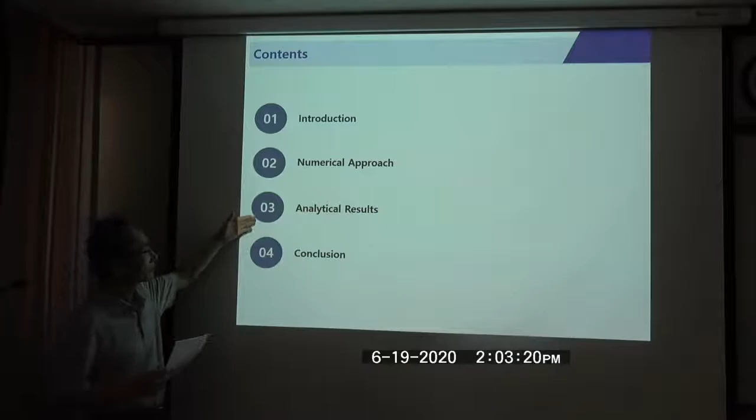Today I'd like to present a paper regarding air purifier technology trend. For this paper, I organized it this way: first the introduction, second the numerical approach, then analytical results, and finally some conclusions.

For the introduction, there are many issues based on the serious problems in the atmosphere. Due to the deterioration of air quality caused by environmental damage and high-level industrialization at home and abroad, measures against fine dust are currently very serious.

In China especially, environmental problems have become very serious due to the increase in vehicles, climate, inland area, and satellite urban development. This fine dust not only poses its own risk but also causes health problems that seriously affect health.

The demand for air cleaners has rapidly increased. Air purifiers have been used primarily for public or medical facilities, but recently, as demand for household use has increased, various development has been conducted.

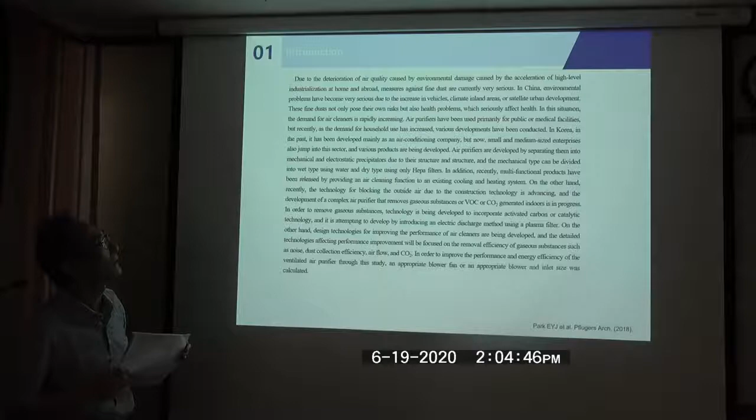In Korea, in the past, air purifiers were developed mainly by air conditioning companies, but now small and medium-sized enterprises are also entering this sector, and various products are being developed.

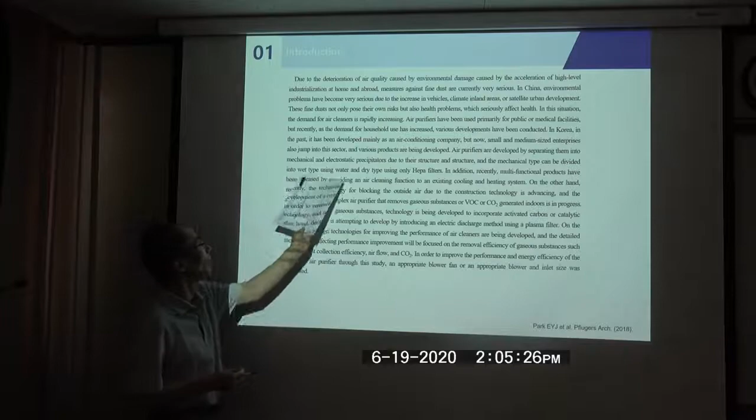Air purifiers are developed by separating them into mechanical and electrostatic precipitator types based on structure. The mechanical type can be divided into wet type using water and dry type using only HEPA filters.

In addition, recently, multifunctional products have been released, providing an air cleaning function through an existing cooling and heating system.

On the other hand, recently, the technology for blocking outside air due to construction techniques is advancing. And the development of complex air purifiers that remove gaseous substances, such as VOCs or CO2 generated indoors, is in progress.

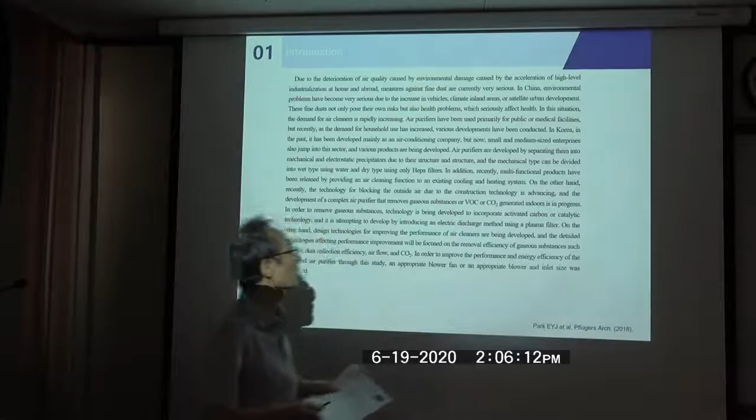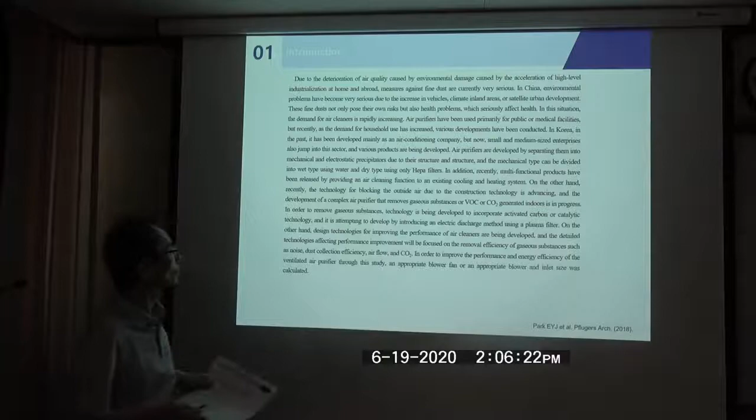In order to remove gaseous substances like this, mainly CO2, technology has been developed to incorporate activated carbon or catalytic technology, and there are attempts to develop methods using an electric discharge method with a plasma filter.

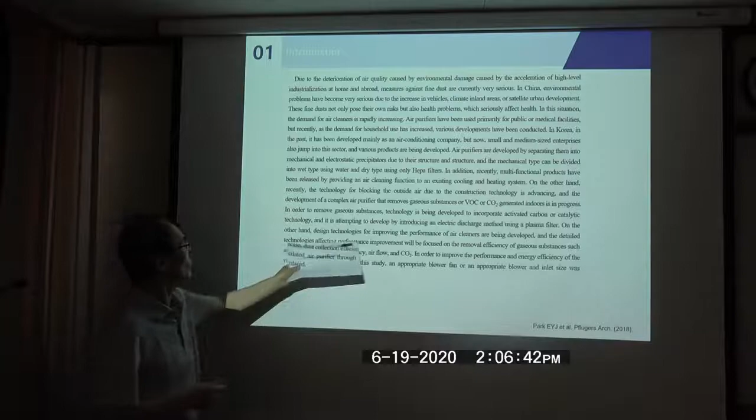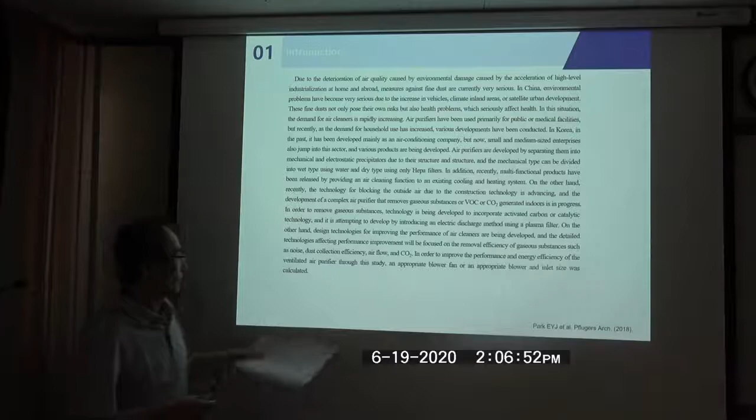On the other hand, design technology for improving the performance of air cleaners is being developed. The detailed technology affecting performance improvement will focus on removal efficiency of gaseous substances, noise, dust collection efficiency, airflow, and CO2, in order to improve the performance and energy efficiency of the ventilated air purifier through this study.

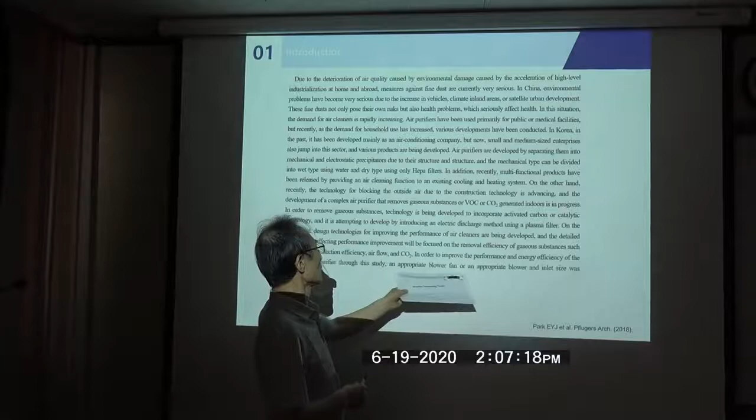Through this study, an appropriate blower and inlet size was calculated.

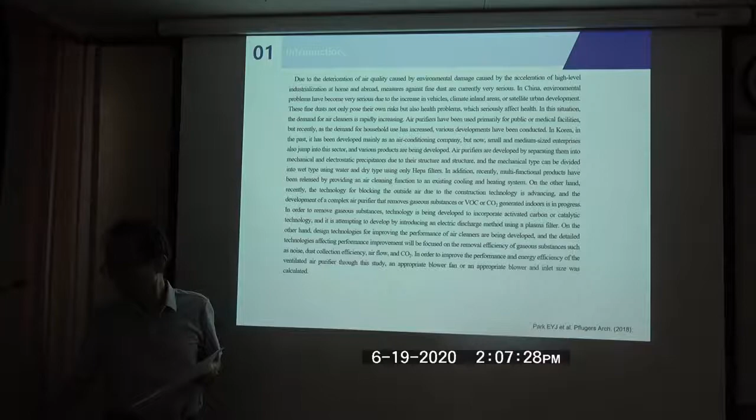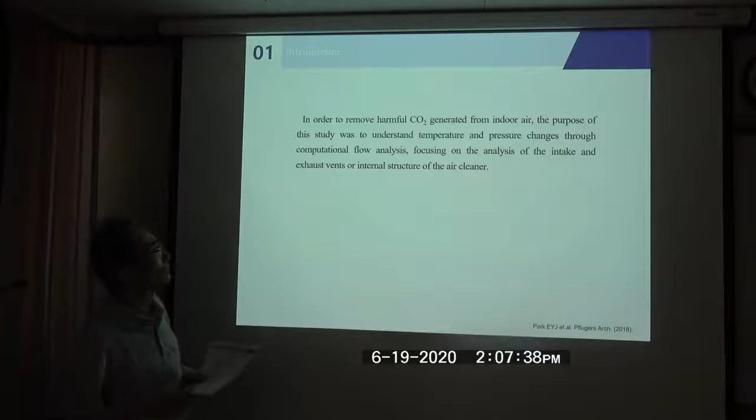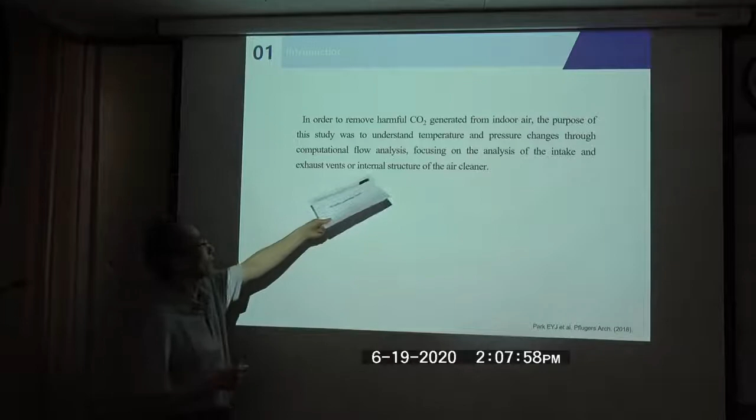Let's summarize the focus of this research. In order to remove harmful CO2 generated from indoor air, the purpose of this study was to understand the temperature and pressure changes through computational flow analysis, focusing on the analysis of intake and exhaust vents and the internal structure of the air cleaner.

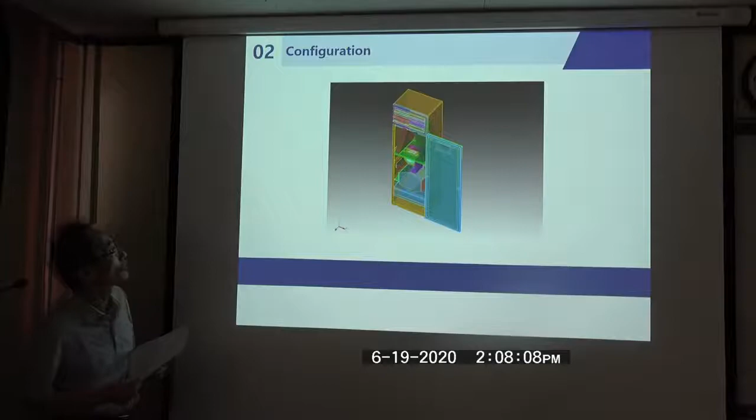This is what we try to understand regarding the configuration of the air purifier. We are basically focused on these configurations.

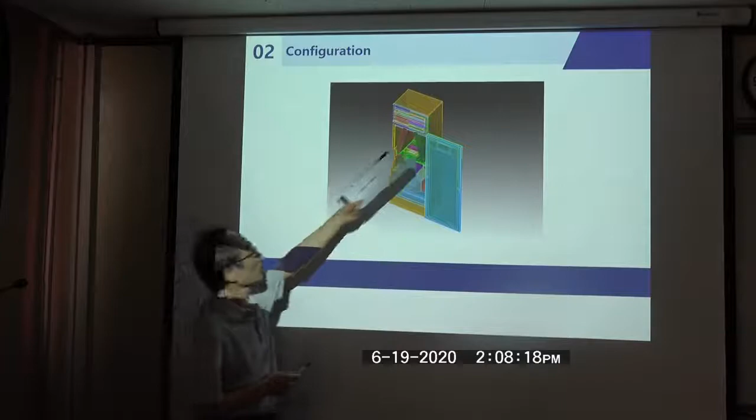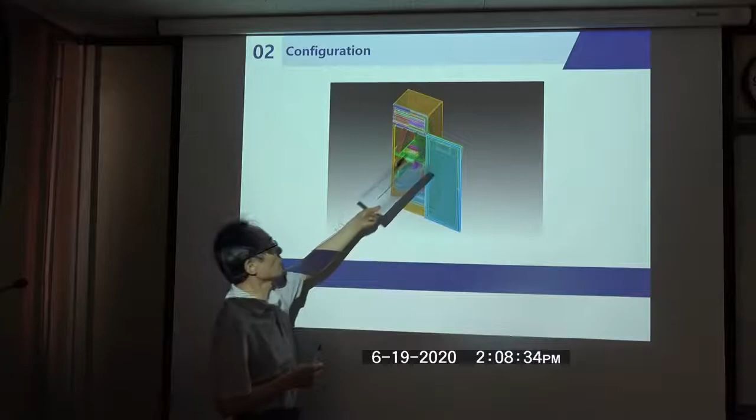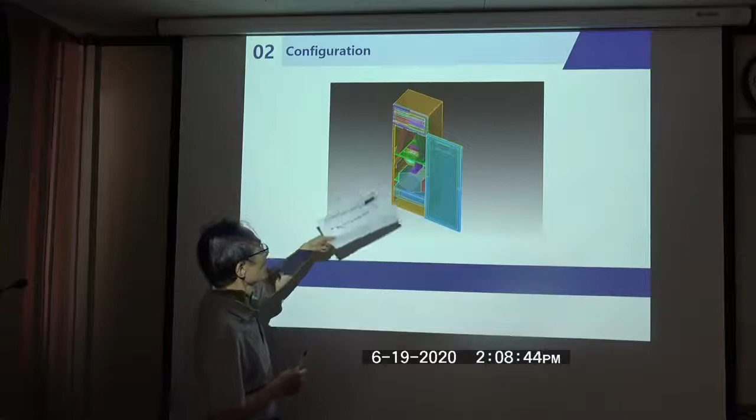This is an outlet vent, and this is a fan, and on the other side there is another fan for the exhaust flow. The supply air comes from here, is output from here, moves through this path, and then CO2 inside is going through this way and then goes outside.

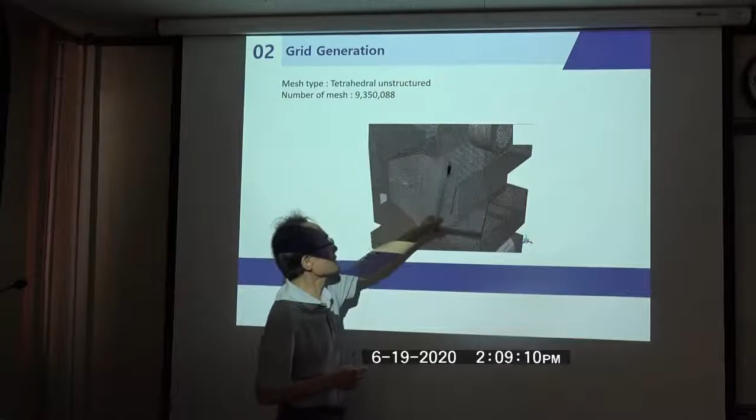Basically, we are focused on this heat exchanger.

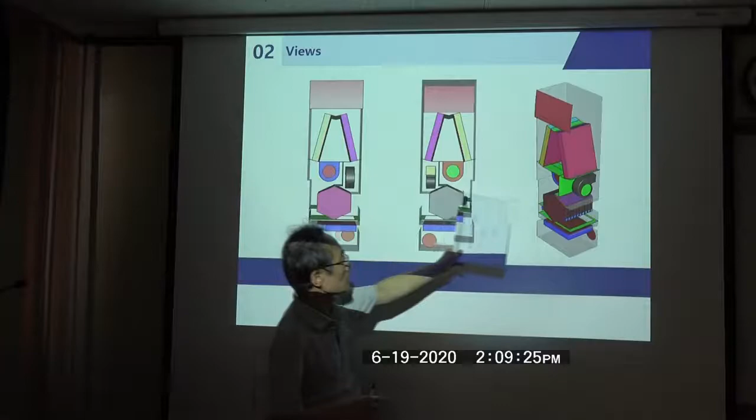Let's look at some views. This is the front view, and this is the side view, like this. Basically the air goes inside, through the heat exchanger, goes outside, and comes back in through this inside door, and then the CO2 is moving through this way and taken out.

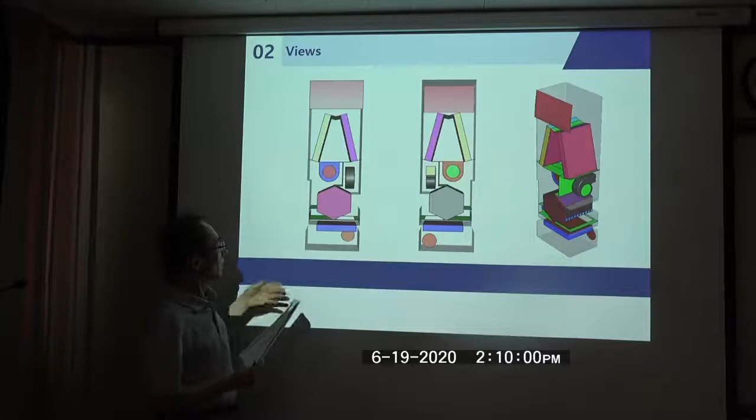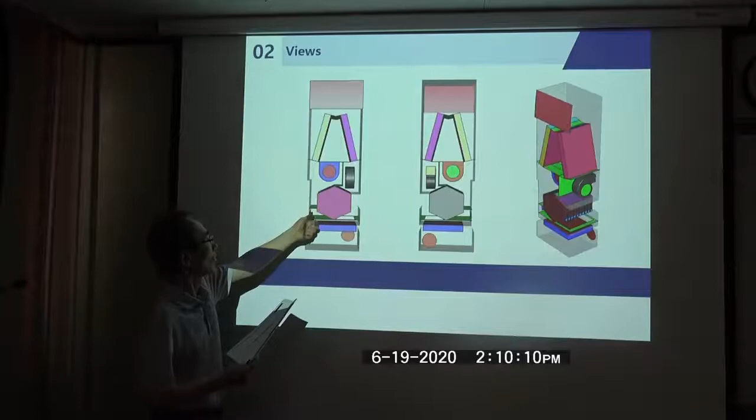This exchanger has a function: since the inside temperature and outside temperature have some differences, we can take out and hold some of that heat, then put it this way, adding more heat here, and it goes outside.

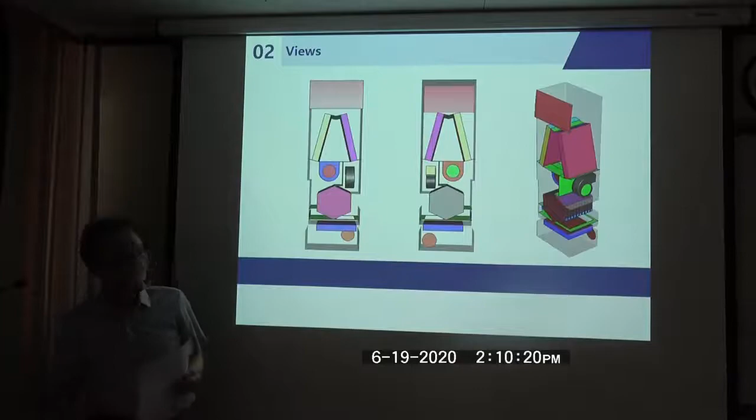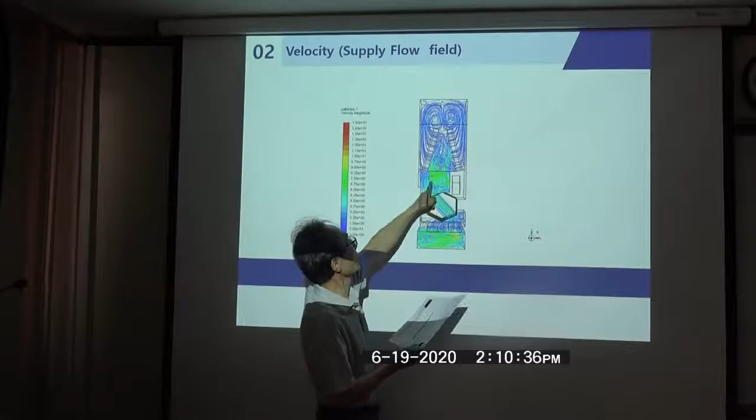Recirculate. This is the velocity profile. This is for the supply flow field, like this, and it goes inside and then moves through and comes out like this. This is only for the supply flow.

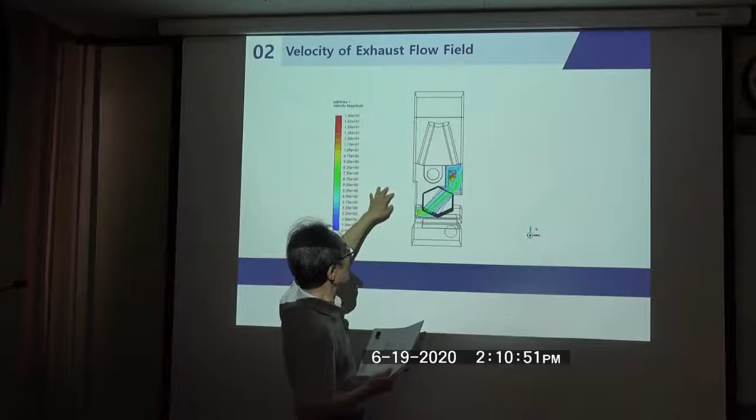Let's look at other things here. This is the velocity of the exhaust flow field, and this is like CO2 inside, which we can take out, and then outside there's some flow, the heat exchange through this system.

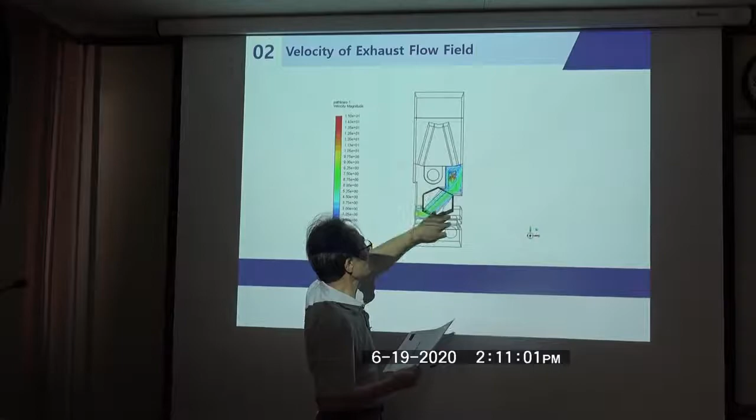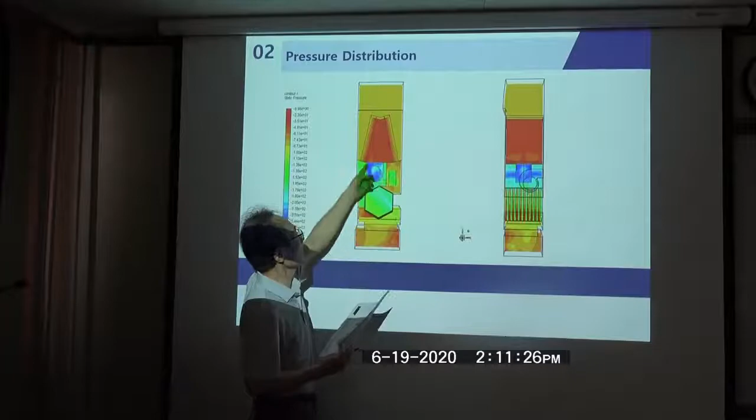This is the pressure distribution. We're using a damper, and like this, outside, and like this, we can measure the pressure distribution. This is on the main fan, and this is the exhaust fan.

This is the side view of the pressure distribution.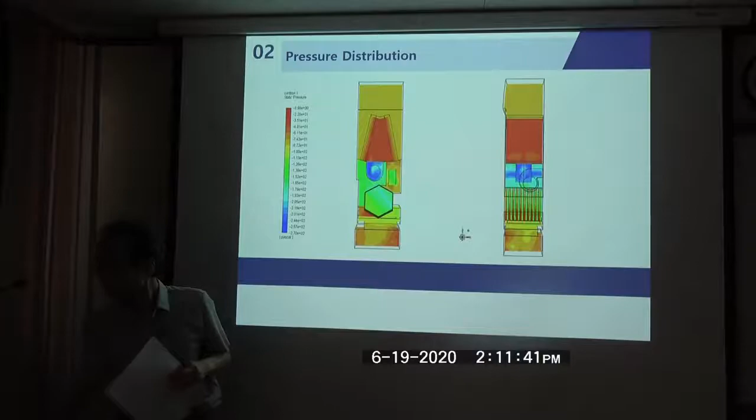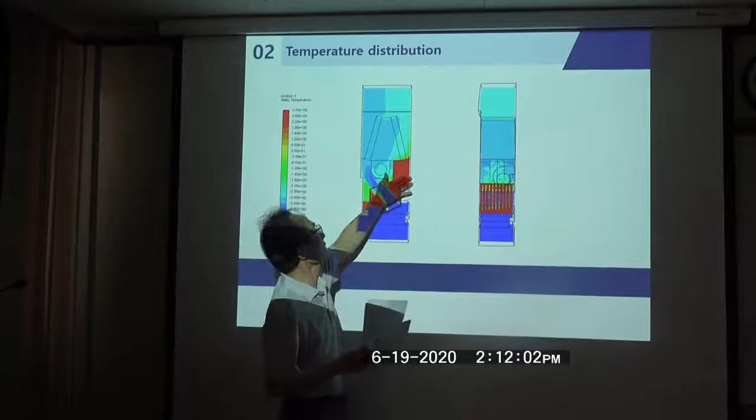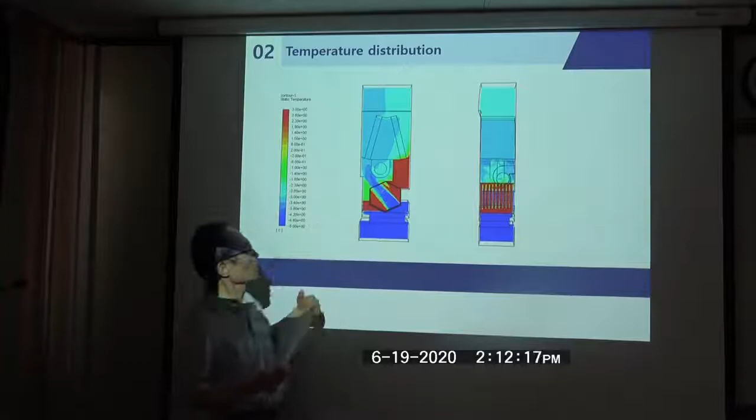This is the temperature distribution. As you see, the temperature here is very high, represented in red color, very hot, coming in and coming out this way, and then another flow, a cool flow, is coming inside, and there is heat exchange happening, so we can pass the energy through and save heat energy.

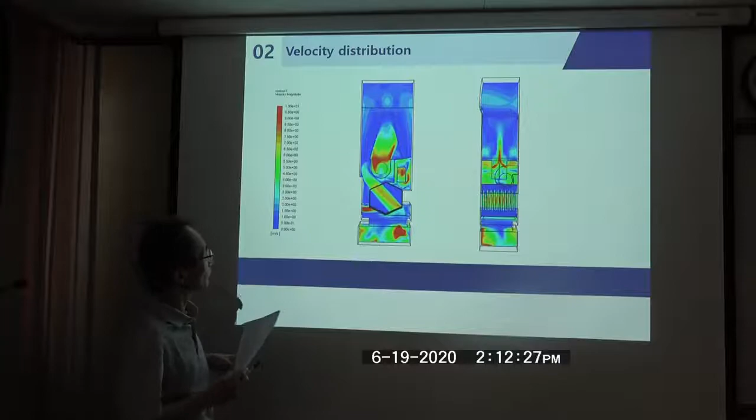This is for velocity distributions, and the whole thing is like this, showing the velocity distributions.

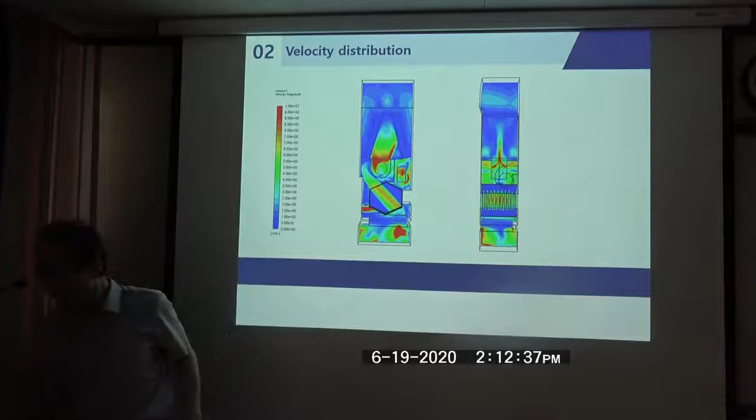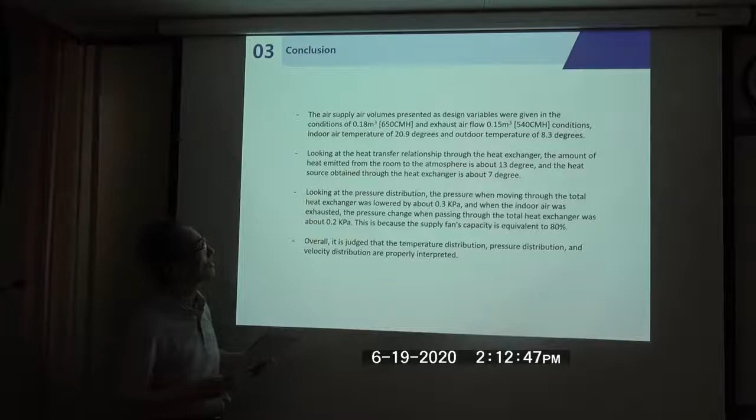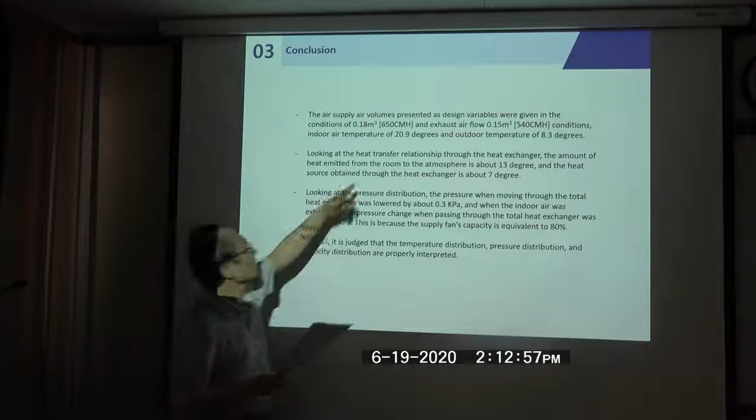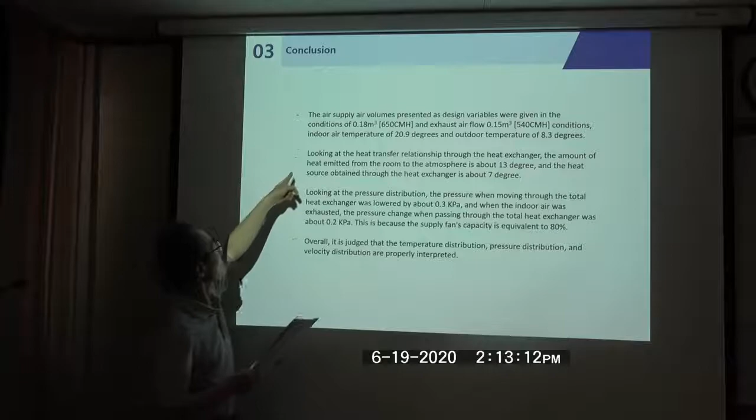Let's make some conclusions. First, air supply volume, represented as a design variable, was given in the condition of 0.18 cubic meters, which is called 650 cmh, and the exhaust airflow is 0.15 cubic meters, corresponding to 540 cmh. Conditions: indoor air temperature is 20.9 degrees, and outdoor temperature is 8.3 degrees.

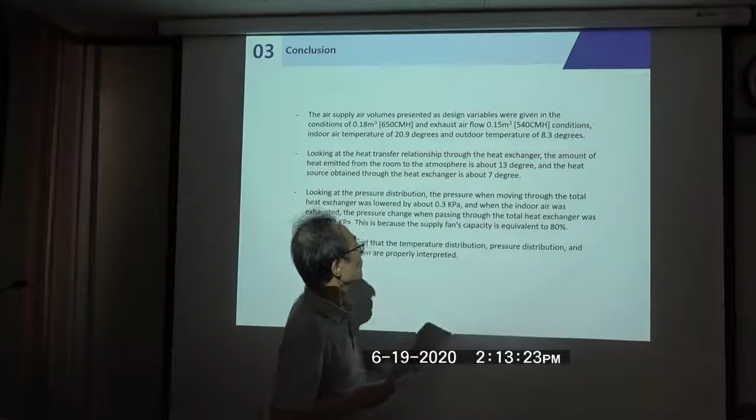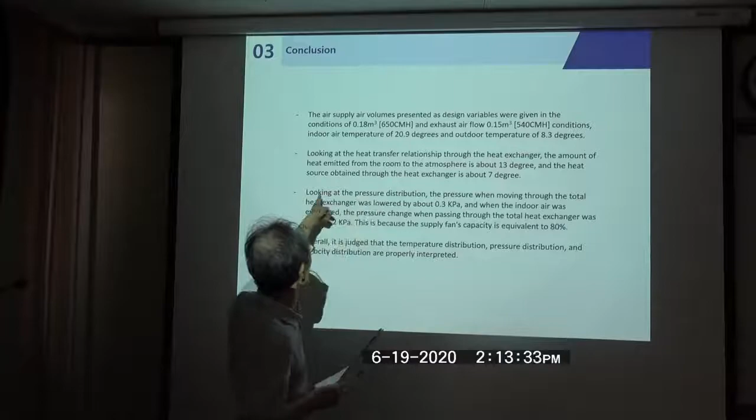There's something that has to be exchanged. Look at the heat transfer relationship through the heat exchanger: the amount of heat emitted from the room to the atmosphere is about 13 degrees, and the heat obtained through the heat exchanger is about 7 degrees.

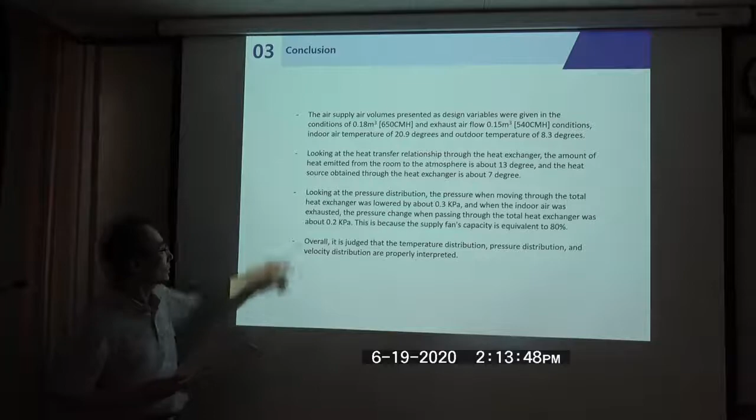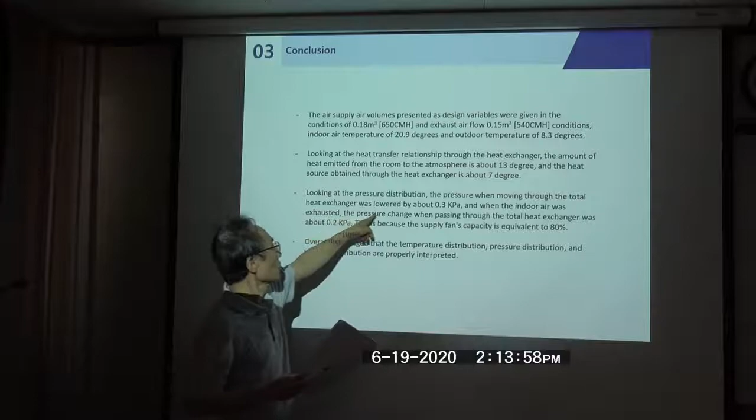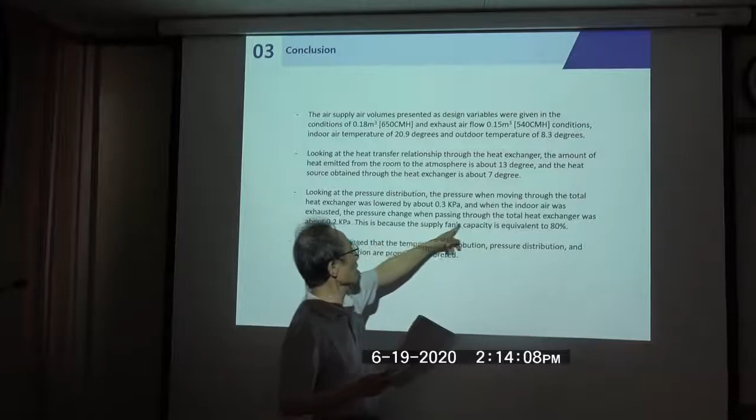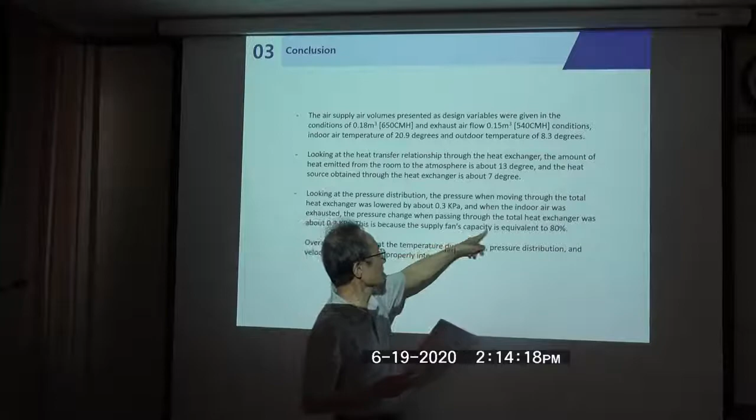Also, in terms of pressure distribution, the pressure when moving through the total heat exchanger was lower by about 0.3 kilopascals, and when the indoor air is exhausted, the pressure change when passing through the total heat exchanger was about 0.2 kilopascals. This is because the supply fan's capacity is equivalent to 80%.

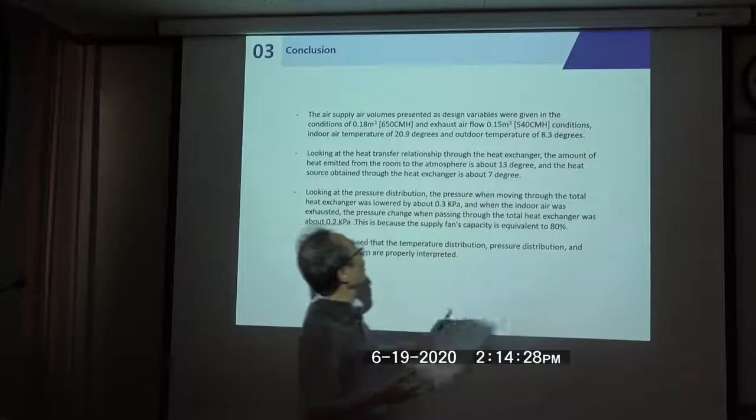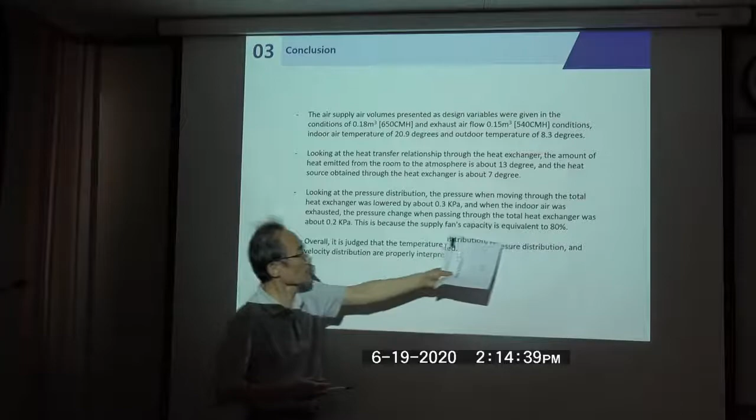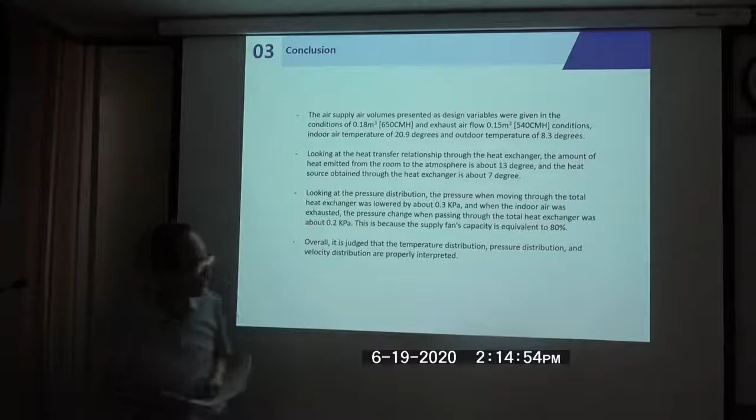This is 650, and the exhaust fan is smaller than the supply fan, that's why it's about 80%. It makes sense. Overall, it can be understood that the temperature distribution, pressure distribution, and velocity distribution are properly interpreted. This is the numerical approach to understanding the air purifier.